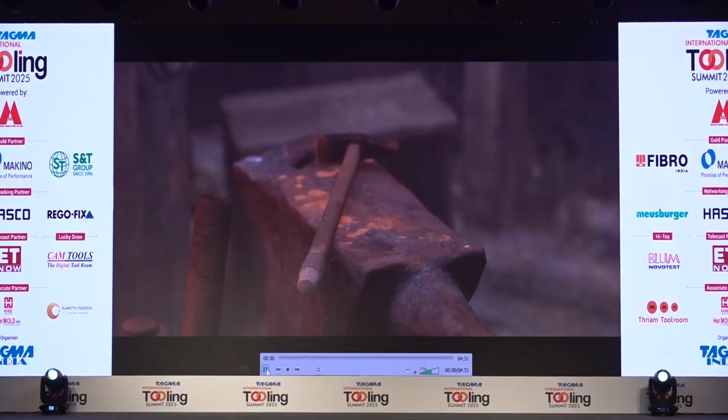Forging has significantly advanced from using rudimentary tools and muscle power to now utilizing advanced machinery to create complex components for industries ranging from aerospace to automotive. Historically, India has always relied on imports for heavy forgings. To bolster self-reliance and recognize the crucial importance of forging in its manufacturing ecosystem, L&T decided to establish L&T Special Steel and Heavy Forgings in 2012, one of India's largest integrated steel melting and heavy forging units, from scrap melting to the dispatch of finished forgings housed under one roof.

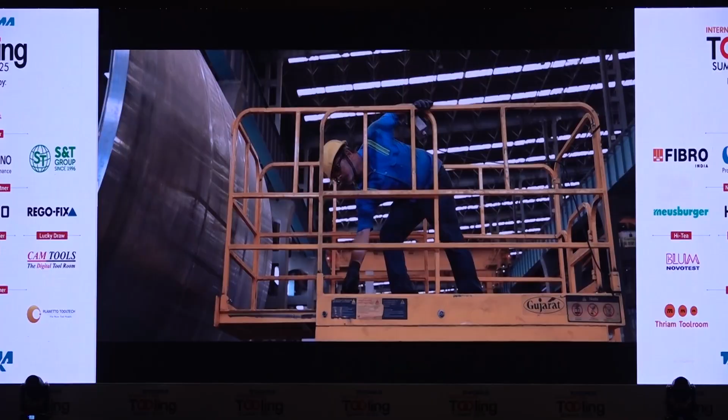LTSHF spans over 400,000 square meters. Aligned with the Mission Zero Harm agenda set by our CMD, Mr. S.N. Subrahmanyan, LTSHF prioritizes the highest standards of safety and well-being for its employees.

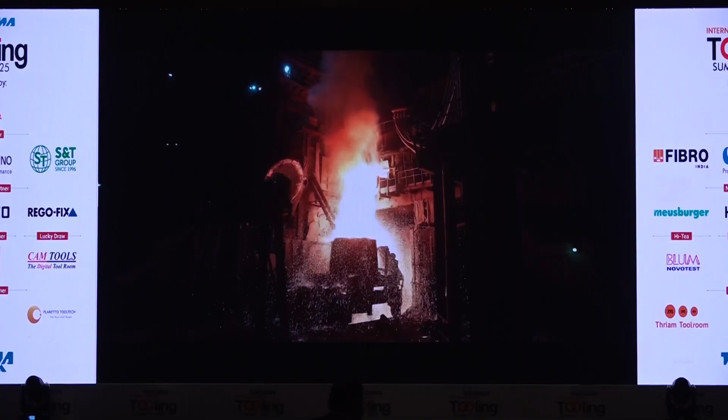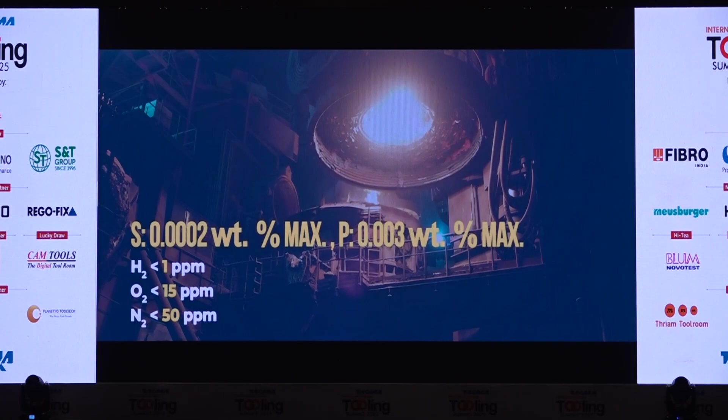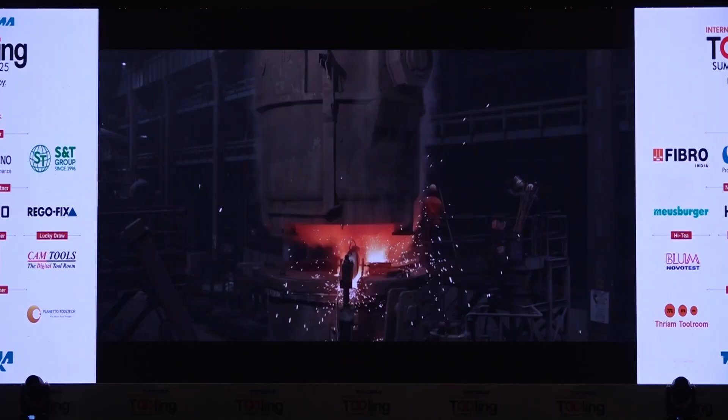The production of high-quality steel begins in our 120-ton electric arc furnace, where scrap metal is transformed to molten metal. We utilize a ladle refining furnace for the highest levels of chemical precision, adding alloying elements with pinpoint accuracy to minimize tramp elements and remove unwanted gases. For cleaner, stronger steel, it is sent for vacuum degassing. Finally, the molten steel is cast into ingots. We employ both atmospheric and vacuum ingot casting, allowing us to tailor the solidification process for optimal material properties.

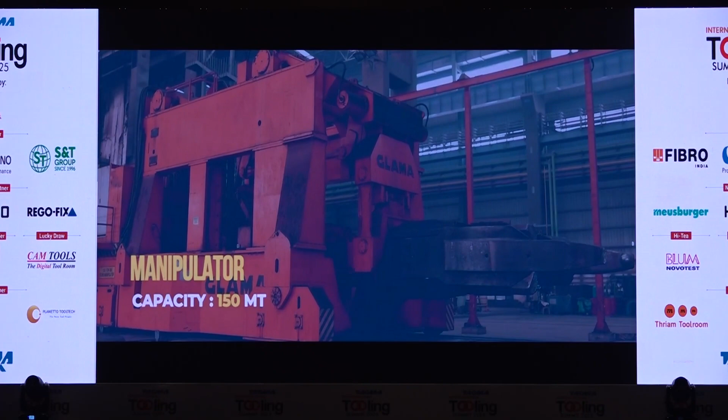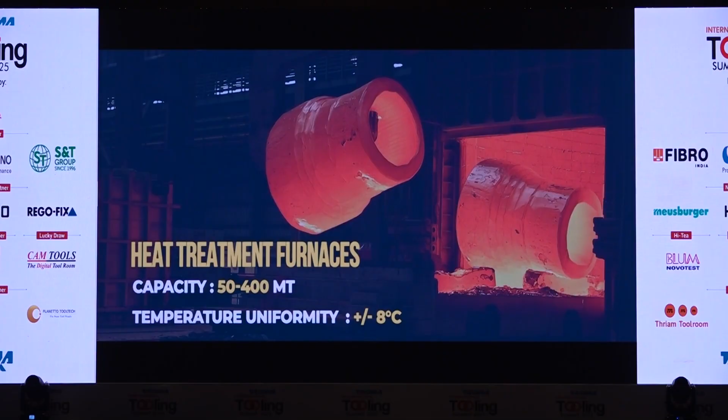We are proud to have developed over 70+ steel grades in a short span. LTSHF is home to the largest press in India with a capacity of 9,000 metric tons, along with a manipulator of 150 metric ton facility, producing forgings of exceptional quality and size. The heat treatment shop comprises furnaces ranging from 50 to 400 metric tons, equipped with recuperative burners, helping us save carbon emissions and energy. We utilize state-of-the-art quenching tanks with capacities of up to 1 million liters, equipped with advanced agitation technology.

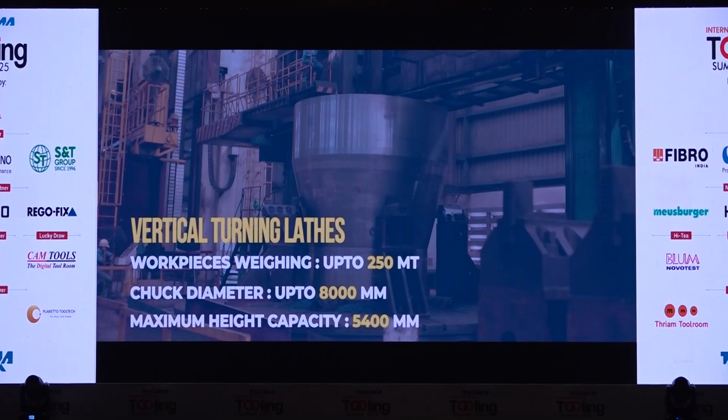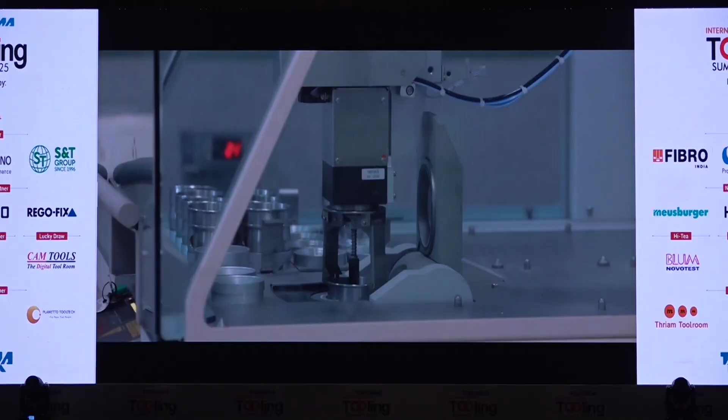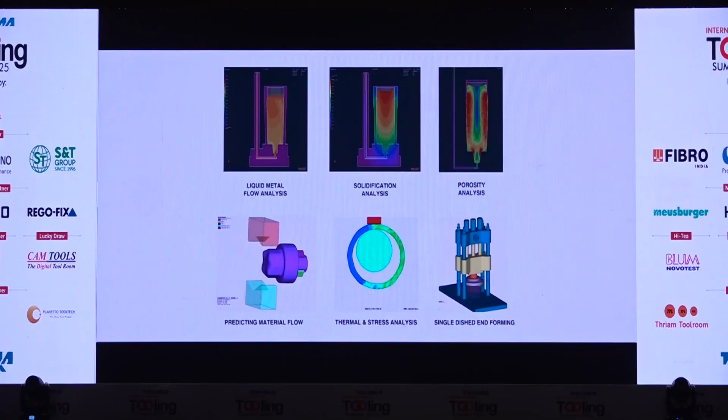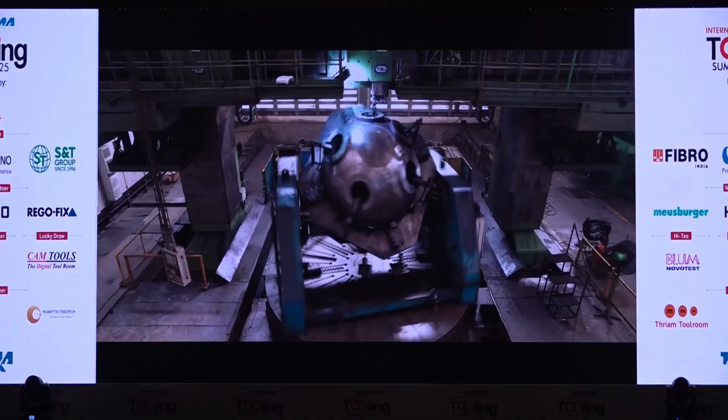Precision meets power in our machine shop, consisting of vertical turning lathes, floor horizontal boring machines, deep hole drilling machines, and horizontal lathes. Our NABL accredited laboratory is fully equipped to perform comprehensive testing ranging from SMS, mechanical, metallography to R&D metallurgy labs. We leverage cutting-edge simulations for in-depth analysis and smart engineering to ensure the highest quality in every product. For the nuclear sector, we are the only Indian manufacturer for heavy and critical forgings for the Indian nuclear program. Our comprehensive abilities cover the full spectrum of components for steam generators, bleed condensers to pressurizers.

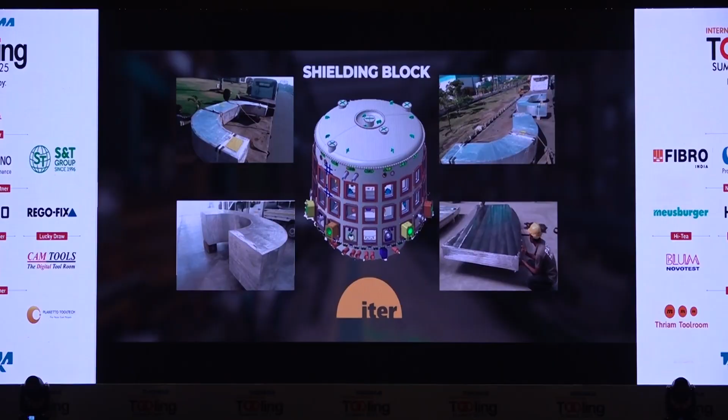Internationally, we have produced over 100 plus forgings, up to 900 millimeters thick stainless steel plates for ITER. Our commitment to innovation extends to the strategic sector, having developed indigenous special steel grades, including titanium alloy forgings for India's deep-sea exploration program Samudrayaan.

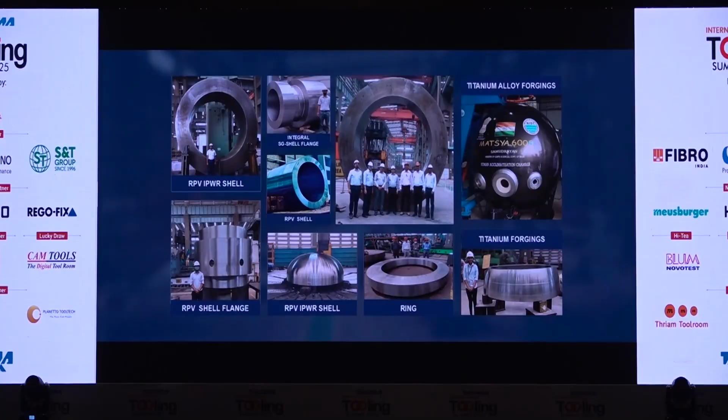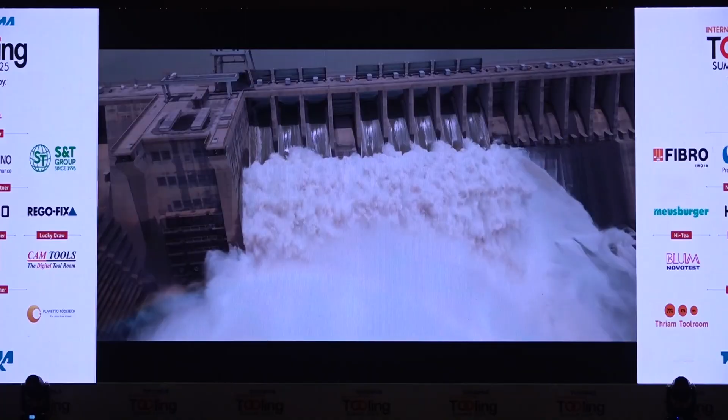LTSHF serves the diverse needs of the process plant industry, including shells, tube sheets, dished ends, lifting lugs. LTSHF plays a vital role in supporting the growth of the renewable hydropower industry by producing some of the heaviest forgings, such as Pelton runners, thrust runners, and hydro shafts, helping India transition to cleaner energy sources. For the thermal power industry, we've indigenously developed and delivered single-piece Hemi heads and tube sheets.

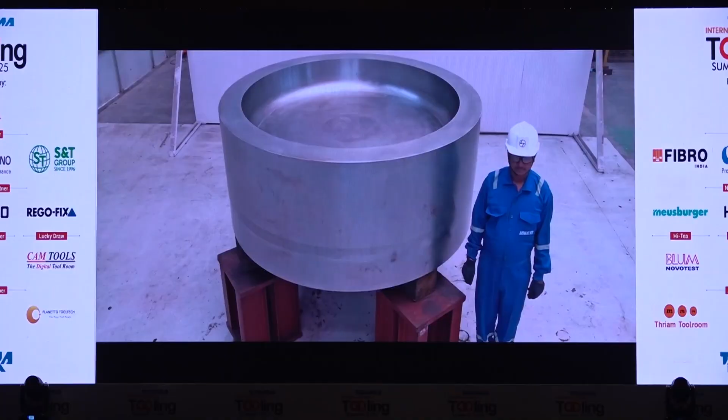L&T SSHF has leveraged its expertise in advanced manufacturing to enter the high-tech rotor business, helping to meet the country's growing energy demand. We continue to expand our global presence, serving over 100 customers spread over more than 10 countries.

At L&T SSHF, we are committed to achieving water neutrality by 2035 and carbon neutrality by 2040. Our platinum-rated Green Administration Building further exemplifies our commitment to sustainability. Over 5,500 trees cover 30% of our facility, reducing approximately 3,000 tons of CO2 emissions annually.

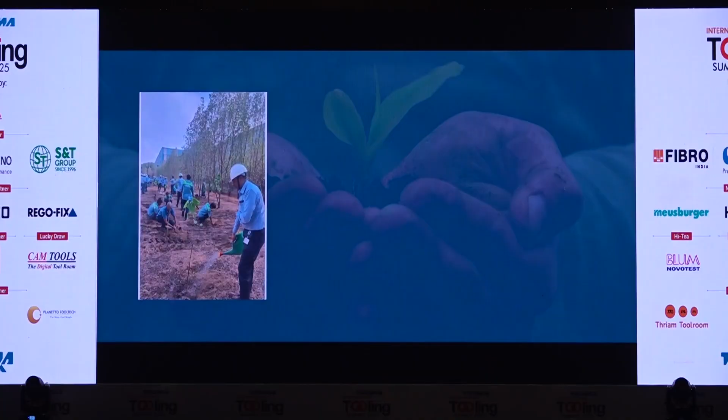Sustainability is not just a goal, it's a core value that drives our operations, playing a key role in advancing the Make in India initiative and Atmanirbhar Bharat vision.

So that was a brief video of the capabilities and the capacities what we have at L&T Special Steels and Heavy Forgings.

So L&T Special Steels and Heavy Forgings is part of the Larsen & Toubro conglomerate, which has a global reach. And the genesis of this plant was to make forgings so that India can become self-reliant. So one of the main motives of setting up this plant in 2012 was to develop forgings which were being imported.

In the last short span of 12 years, we are a very young company compared to the other forge masters. But in the short span of 12 to 14 years, we have developed over 70 plus grades. And we have developed forgings for the nuclear, strategic, as well as the hydel and thermal plants, the forgings which were previously imported. Recently, we have also developed forgings for the wind industry.

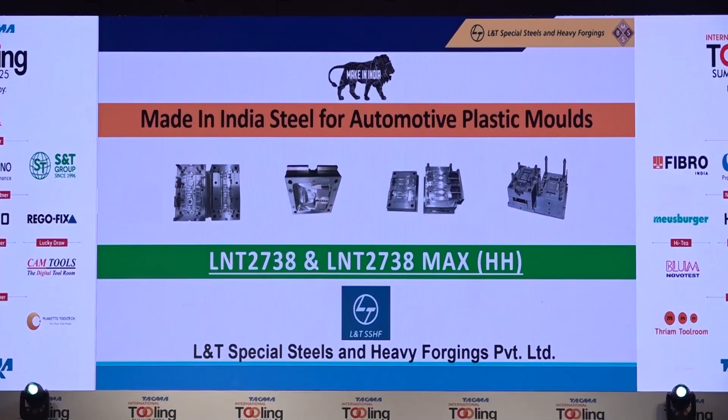So with that aim and mission in mind, we have ventured into Make in India steel for the automotive plastic molds also. So I will just quickly first cover in brief the capabilities and the capacities what we have.

So one of the main advantages which we have is we have an integrated steel melting as well as a forging facility. So this gives us advantage with respect to ensuring the quality right from the raw material stage to the finished supply stage. As well as it also gives an advantage in terms of the delivery times, since the ingot can be cast immediately upon whenever, as and when required.

We have our own in-house testing facilities, as well as recently we have set up a cell called EDRC, which is Engineering Design and Research Center, with the aim of providing customized steel solutions to our end customers. So this cell will work on the R&D efforts and understand the customer requirements and customize the steel to provide a solution which is a win-win for both the customer as well as for us.

And lastly, we have a global supply reach and support, being part of a bigger conglomerate like Larsen and Toubro.

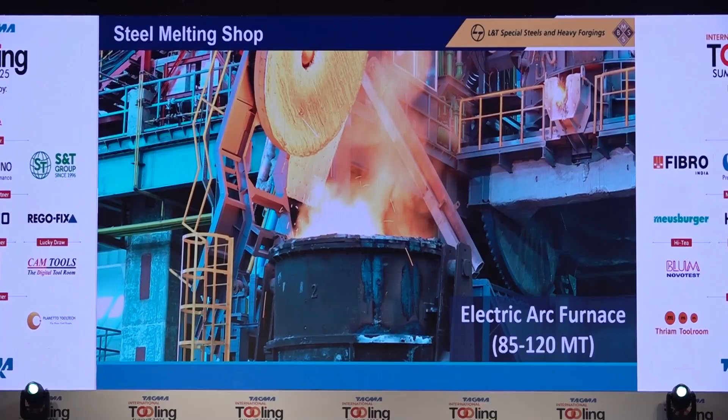Just in brief, we have an electric arc furnace capable of melting steel up to 85 to 120 metric tons, a vacuum degassing unit where we achieve strict control over hydrogen, so we can go less than 1 ppm if required. And in our steel melt shop, we can also have control over tramp elements such as sulfur and phosphorus.

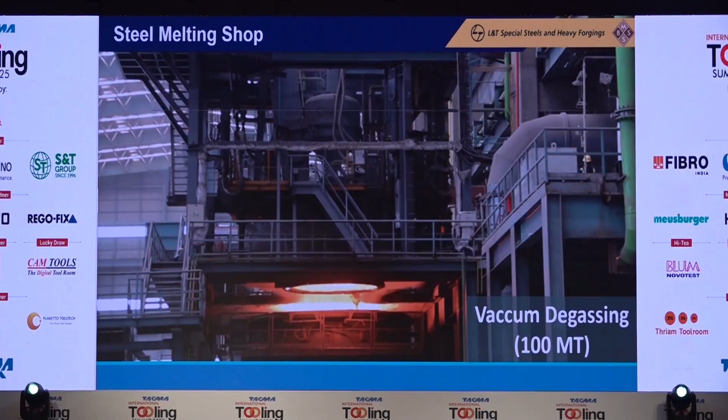We have achieved levels of 0.0002% for sulfur and 0.003% for phosphorus. So you see the advantage of having a steel melt shop is we can customize the steel as well, and the stringent requirements can also be met.

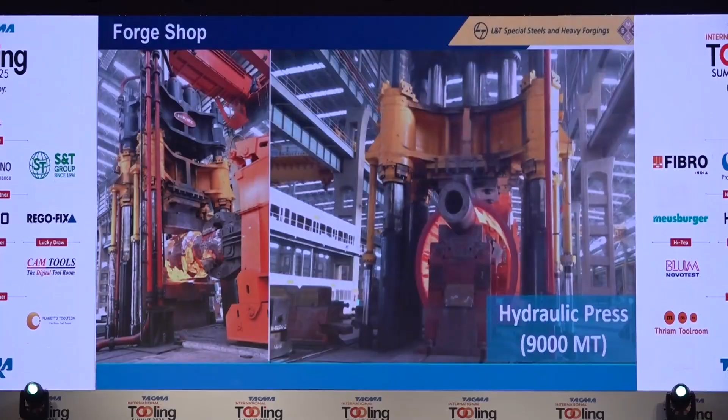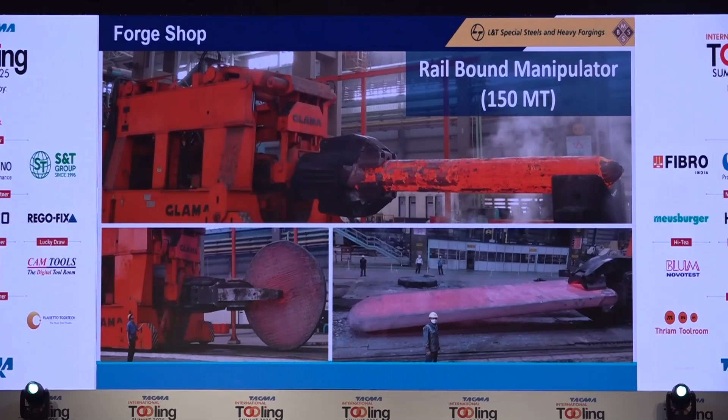Coming to the hydraulic press, we have the biggest, largest, heaviest press in India, the 9,000 metric ton press. And we also have the biggest, largest rail-bound manipulator of 150 metric tons, which helps us in catering to the heavy and critical forgings which were previously imported.

We also have state-of-the-art heat treatment furnaces where we can achieve all types of heat treatments like annealing, quenching, hardening, and tempering. We also have quench tanks, along with a facility to heat as well as cool the quench tank as per the requirements.

This helps us cater to a wide variety of grades with the capacity what we have. And finally, we have our own in-house NABL accredited laboratory. We have facilities for carrying out hot tensiles up to 900 degrees also if needed.

So all this helps us cater to the most important need of the hour, that is made in India tool steel. So now I would request my colleague Mr. Ashish, who will take over and explain the tool steel which we have developed indigenously. Thank you.

Good afternoon, friends, delegates. I extend my friendship to those delegates who we have not been introduced. I would first, before I go ahead on my presentation, I have been asked by all my friends and well-wishers since yesterday, what made you change from what you were doing for last 25 years to this whole new thing?

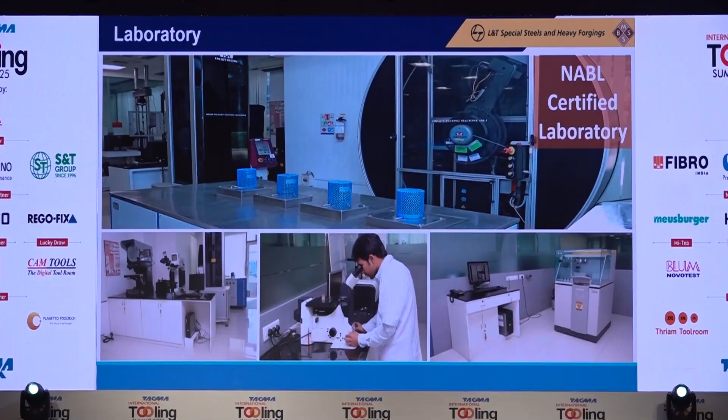The answer is my tooling fraternity, my tooling family. You people made me change my mind and understand that the requirement is actually in India. So why to import steel? And if we have such a beautiful mill which is there to serve us, there is no point we continue listening to the same music and the same stereotype. It's better to have a change.

And in these last 25 years, I would thank my European principals who taught me well. I know what the secret recipes are. I know what is to be done to deliver a premium quality steel. To my fellow tool makers who have supported me in the last 25 years with their support, and we have been standing with each other in thick and thin. So I am very happy to present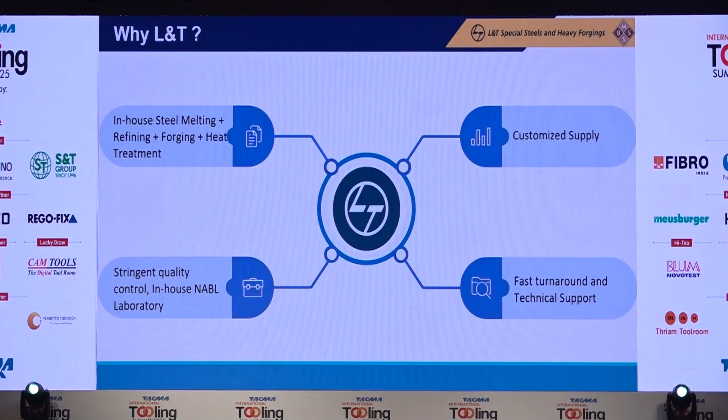And this is how we have gone ahead with these 2 champion grades, which are very common. Everybody in this room knows 2738. Since it's our brand, we say L&T 2738 and L&T 2738 Max, which is the HH version.

Chemistry, you can very well see these are the international standards with what is being accepted world over, but the actual steel which is going to come to you, if we have mentioned phosphorus, which is 0.02, Surendran has already mentioned that we have the capability and our equipments can deliver phosphorus 0.009.

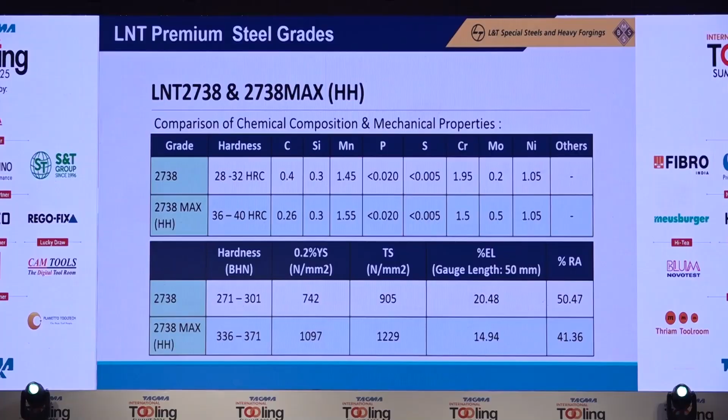We talk about sulfur, which is the most, I would say, the alien element which is not supposed to be in our plastic mold steel. The standards are 0.005, which is internationally acceptable, the global standards. But our chemistry is 0.001.

You pick any of my test certificates, which we have already produced around 500 tons of 2738 and HH. You will find the chemistry is 0.001. Phosphorus is 0.009.

So we are talking of something which is better, which is superior, which is going to deliver what today's challenging automotive sector requires.

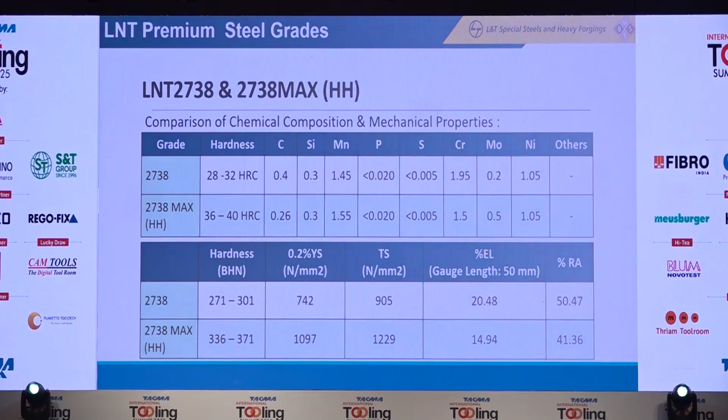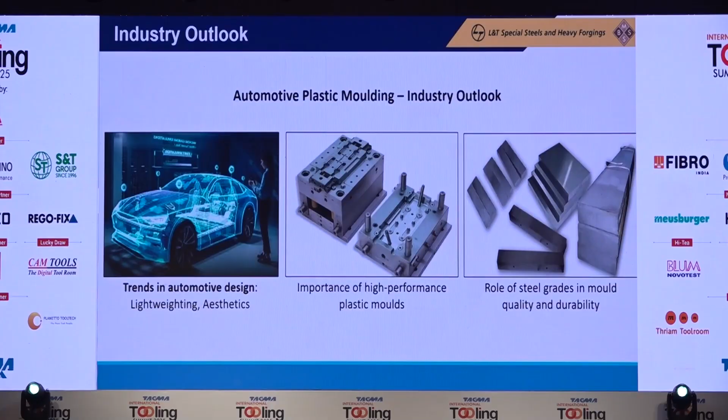Talking about the auto industry, as we are living in the EV era, the whole dynamics have changed. When you talk about a car, a new model, the designing, everything is today so dynamic and robust. Previously, we used to have front grills because there was the ICE engine which requires the grill. Here, you have nothing. The front of the bonnet is now for storing luggage. The whole design of the automotive industry and the new models which are coming, they are much more aggressive, much more beautiful, much more dynamic. Aerodynamics are amazing.

And the complete bumper, what you see in the front, up till the bonnet, it is a painted part and one piece.

So the requirement of the tooling industry has gone from the normal sizes which we were using, like up till 800 thickness, 1200, 1500. It has gone beyond. Now 1000 and 1100 is the thickness what the OEs are talking of.

And the mold makers are very much geared up, but you don't have steel. We have been supplying steel for the last 25 years for a very well-known brand called Gröditz. And in that also, the maximum size which I would say back in the day till 2020 we have imported was like 900, 910. It has never gone beyond that. There was no requirement. Now the demand is 1,200.

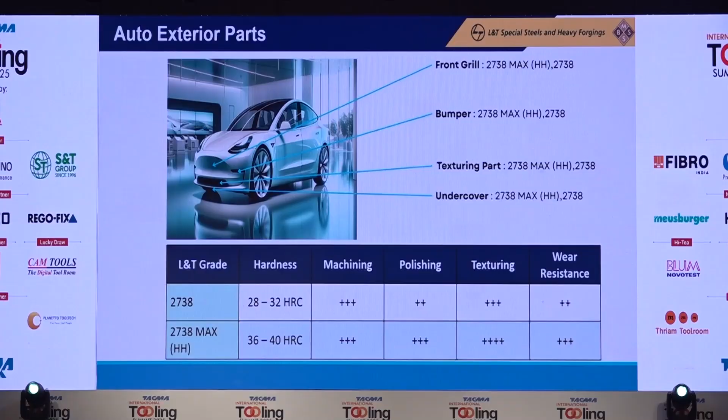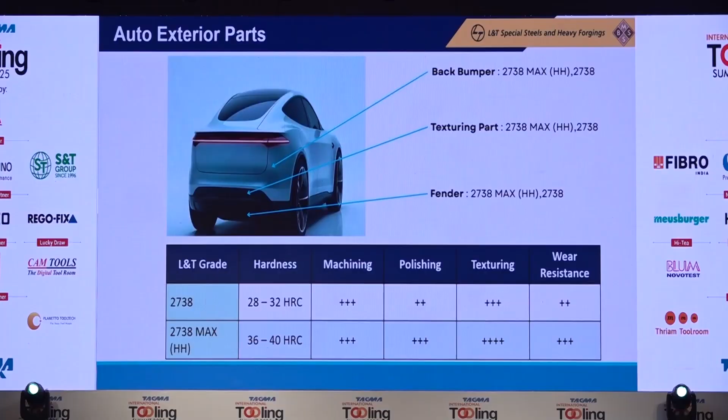Talking about the exteriors, when you are talking of the rear part, here also the bumpers have reached almost the tail light. So again, a huge requirement which can be catered.

The litmus test for every steel manufacturer is the interior. When I meet the OEs and the tier ones, the first question, like when you see the ad for Maruti previously, asking about mileage average, the first thing they ask is whether your steel has good texture or not.

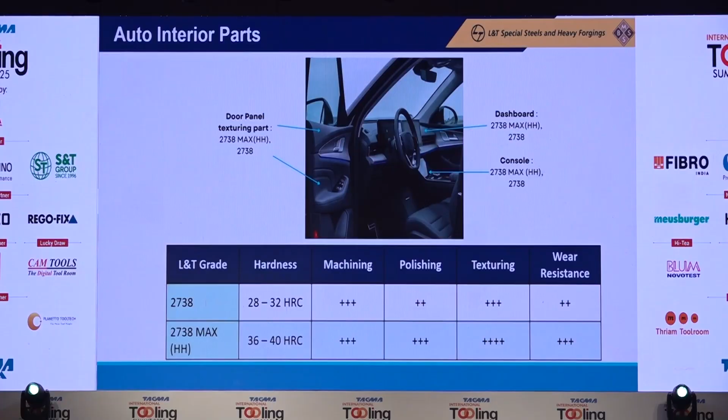So we are prepared. And texturing, my friends, I'm very confident, because when you are getting a steel which has 0.01 sulfur and 0.09 or somewhere around that phosphorus, you cannot go wrong.

Also, there is one more advantage with L&T 2738, the forging press, which is 9,000 ton, the reduction ratio which we are giving is 8:1. The European standards or the global standards accept 5:1. But we want to go beyond. We want to deliver the best homogeneous steel with less segregation. So what you are experiencing and will be demanding is already taken care of.

Both the steels, 2738 and 2738 Max, perform very well. If your projects demand the basic requirement of texturing, polishing, and tool life, which is for say 500,000 shots, we would recommend our 2738. If you have more aesthetics to go for, or higher demand for your tool life, we would recommend our 2738 Max, which has hardness in the range of 36 to 40 HRC. And even the chemistry of 2738 Max is superior.

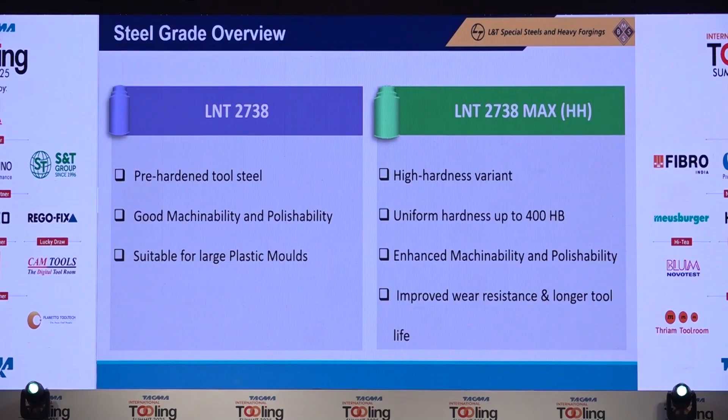And because of that chemistry, you have lower segregation. The melting of this steel, when it solidifies, the solidification happens from the outer area to the inner area. And with the equipment L&T has, the solidification happens faster, where you get a very close grain structure, and the segregation is very low.

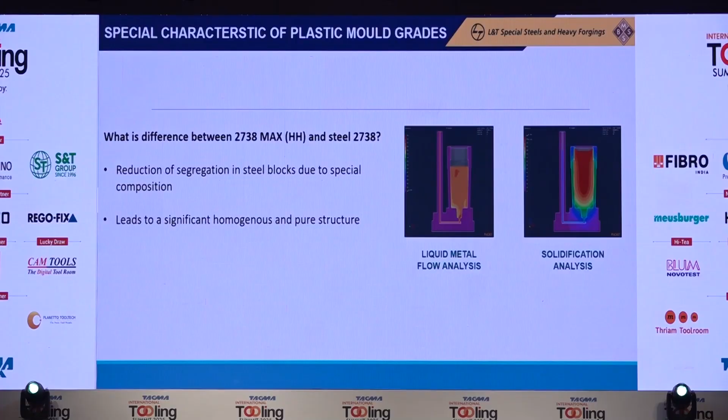Second question which comes up when we are talking of a bigger tool is your IPs, your bumpers, you have to have consistent hardness. My fellow friends from Europe who gave their presentations were also insisting on the same thing, and we have done our homework. The hardness from the surface to the core, in our 2738 Max, will hardly vary by 1 HRC.

That means when you are digging deep into your bumpers, your size is like 800, 900, 1100 millimeters. You almost reach the half of the size, which is 500 millimeter or 400 millimeter, which is where your cavity starts. So that's the most critical part, because when you are machining, you are going deep into this.

First of all, if there is consistency in hardness, you are safe. Your tools will not fly in the air. You will have good machinability, and you can deliver the tool faster because of the inherent microstructure and the consistent hardness. So with 1 HRC variation, you are safe.

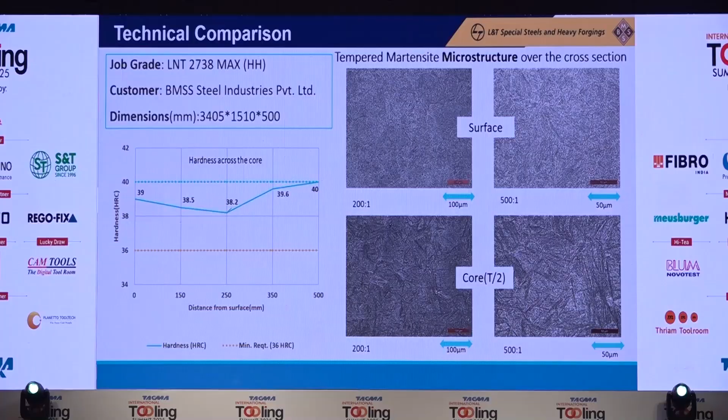I'm happy that there are OEMs present, because these are the questions I have to answer, going to every office and disturbing them. I think TAGMA is the best platform to exhibit yourself in the best way, and you are being heard by 600 tool makers. What best can you expect as a marketing person?

So, key advantages: superior surface finish, high toughness, excellent dimensional stability, ready to use pre-hardened steel, cost effective, and for the longer period, when we are talking of 2738, the steel will make you earn money. What I'm saying will be understood first by the tool makers and then the end user who is going to mold that steel.

The thermal conductivity is almost 33% higher than your 2738. So there are certain parts where your cycle times are quite long, and you want to reduce your cycle time — just change the steel. Don't look at me like this.

You have delayed. Give me 5 minutes. So this is where we want to pitch to all our OEMs.

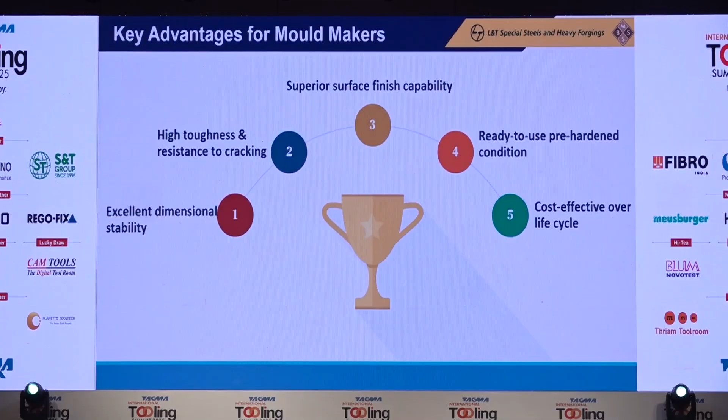First of all, I am Make in India. That's the exception — I'm holding my country's flag. So do join us, support us, because without your support, it's not going to happen.

Everybody is talking about making 99% molds in India. It's commendable, and I really appreciate it. But the steel was not from India. So there is still a vacuum which we have to fill, and we have taken up the challenge.

We are not only planning to serve our Indian tooling industry, we are already in talks to export our steel. So tomorrow, with your support, I'm sure even if the IP is made in some other country, the steel from L&T should be there. That's what my dream is — that Make in India steel is already making noise in the global market.

And that is only possible when we all tool makers, you all friends and my well-wishers, support us. We are ready with almost 1,000 tons of steel in stock, up to 805 thickness in 2738 and HH.

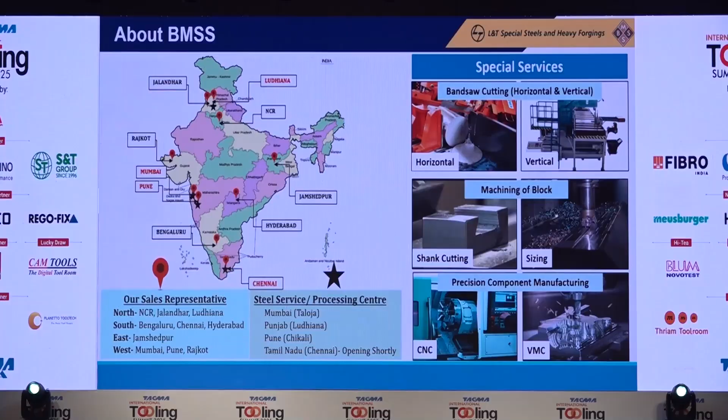We have gone a little conservative because initially we have to go a little slow to create the benchmarks. But once the benchmarks are done, I'm sure 1200 thickness will be an everyday business for us. So thank you very much.

I am resting this session because she is in a hurry, and I understand, being part of TAGMA, I want other panelists to also get equal time. My message is very clear: let's join hands and make this happen under the Make in India Atmanirbhar initiative.